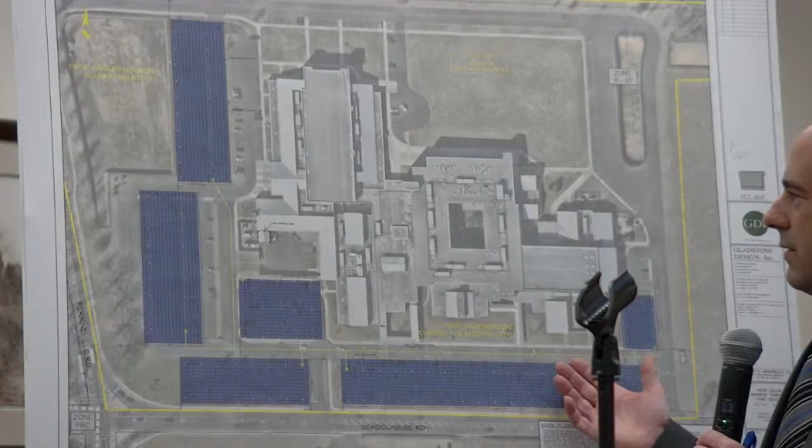Overall, the impervious coverage impact on this is negligible. Most of this is in impervious spaces already, so it's really going to be negligible impact from a stormwater perspective for impervious coverage because of the foundations. And under the municipal land use law, the solar panels are excluded from any type of impervious calculation.

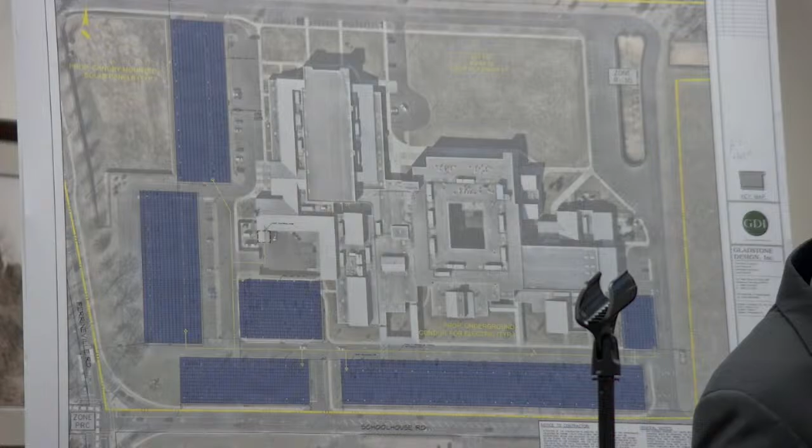That's correct. So the next one that I'm going to go to is the Applegarth Elementary School. So this is going to be A2, Mr. Michelle? A2 for the record.

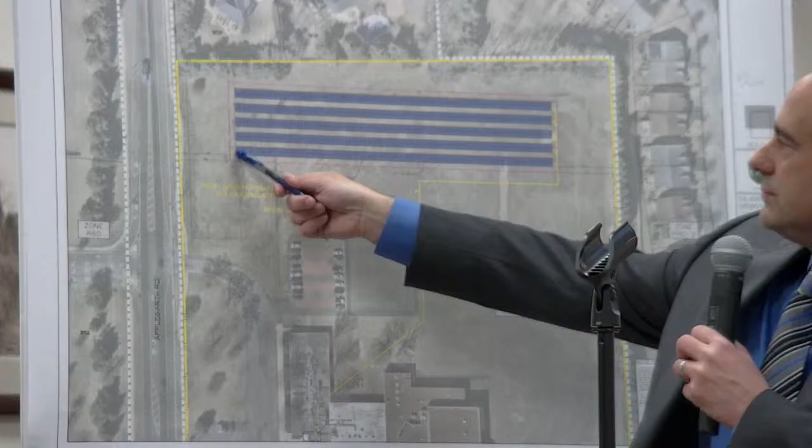So this is a section of the Applegarth Elementary School property. We're proposing a ground-mounted system for the elementary school. This one is actually going to be approximately 700 kilowatts, so 0.7 megawatts in size. It's a ground mount system, set up with panels in portrait orientation, laid out in 5 rows. They'll be supported by a pile-driven column that'll be driven into the ground.

In terms of impervious coverage for this, because we're using pile-driven posts to support it, it's almost negligible. It's about 30 to 40 square feet of impervious coverage for the pile itself, for the foundation, but the panels themselves, as Mr. Simon pointed out, are not impervious under the municipal land use law.

The height of this system is typically anywhere between 7 and 9 feet, based on the angle of the panels as they're supported. You need to have about 2.5 to 3 feet of clearance on the front edge, and about 8 to 9 feet of clearance on the back edge.

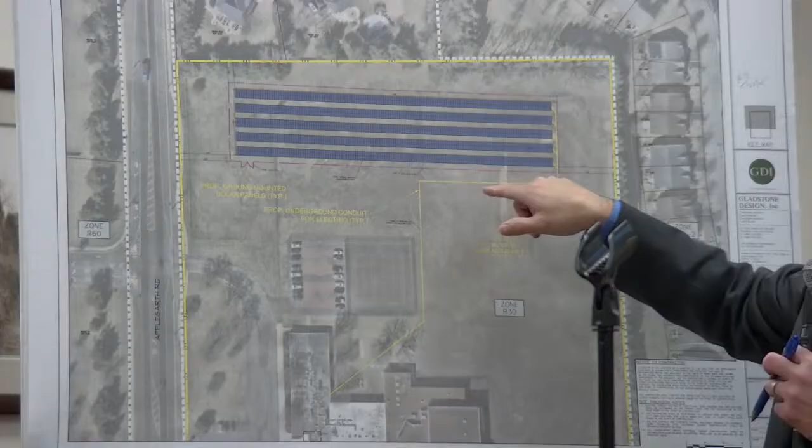It is going to be fenced in. It'll have a 7-foot high fence around it to separate the system from any activities on the property itself. There'll be a conduit run from the system back into the school for power purposes. There's no removal of any trees or vegetation or impact to any of the parking since it sits in a grass field area.

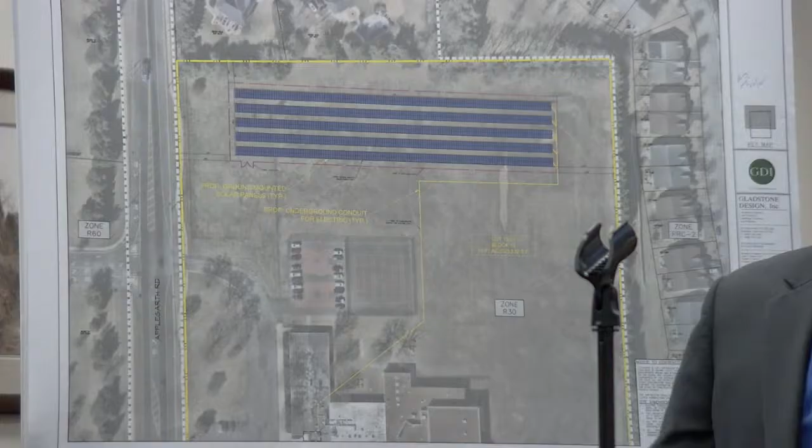There's no lighting proposed for this. There's no impact to that in any way, shape, or form.

The next one we have is for the Oak Tree Elementary School, and this will be A3, dated 5/22/25 for the record.

This is an even smaller system than the one you just saw a moment ago for ground mounted. Again, this is going to be in the field area to the west of the existing ball field, so we're not going to be impacting the ball field that's there now.

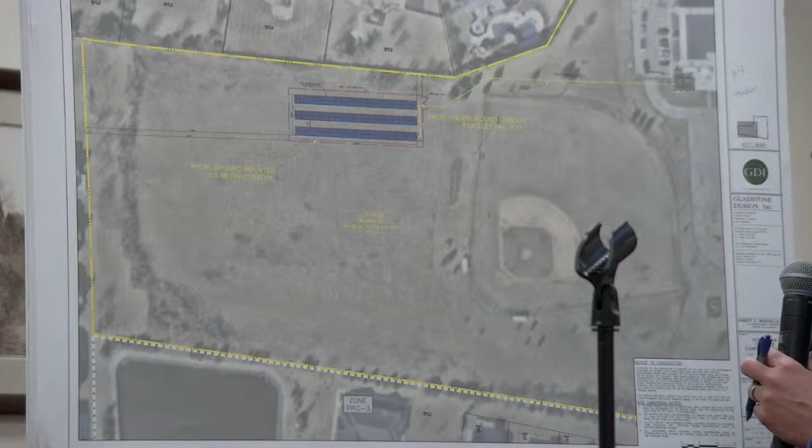This system's actually less than 0.2 megawatts, so it's really small in terms of size. But again, same parameters, same height of 7 to 9 feet, same fence around it, conduit being run back to the building. Again, no impact to lighting, landscaping, or anything on the property other than the area we're taking up for the panels.

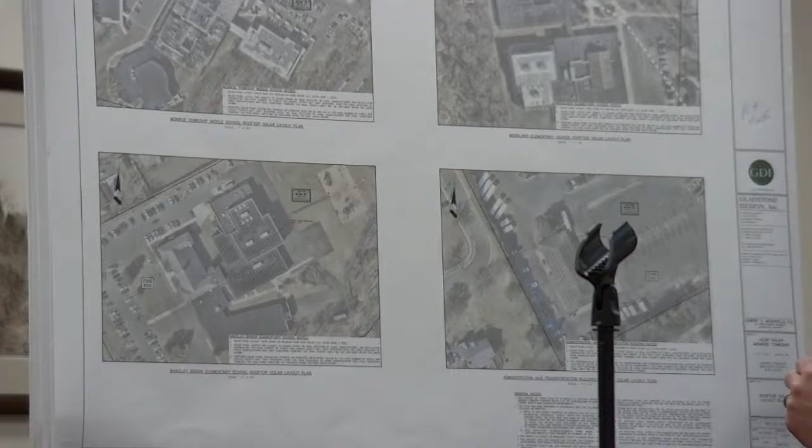And then the last board I have here, we'll call this A4 for the record. This is entitled Rooftop Solar Layout Plans, dated 5/22/25. This basically shows the 4 different facilities where they're doing panels on the roofs of the buildings.

There's no parking lot or ground-mounted proposed here. One is for the Monroe Township Middle School. The other one is for the Barclay Brook Elementary School. Then you have the Woodland Elementary School, and then you have the Administration and Transportation Building as well.

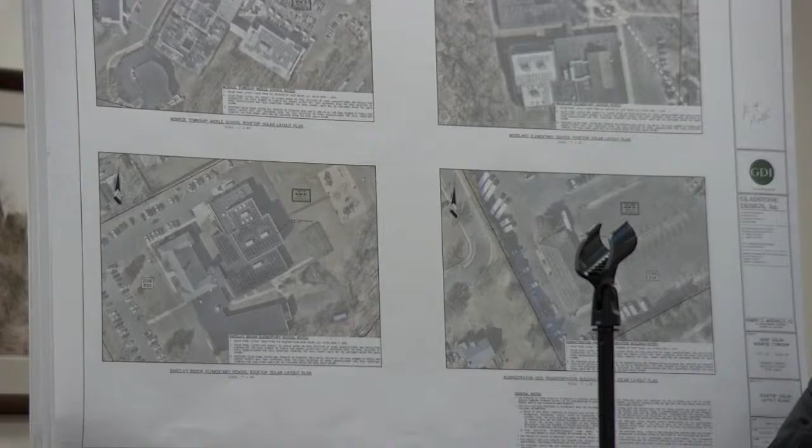So some of these roofs are flat, some of them have peaks to them. In any event, they're all going to be on the roof. Typically, for the flat roofs, they will not be visible from the ground level. The peaked roof, of course, you'll see the panels on that one, but there's no proposed removal of any trees, vegetation, parking spaces, or things of that nature with these plans.

That concludes my direct presentation. Thank you. So we'll open it up for any questions from Mr. Michello with regard to any of the projects.

Do any of our professionals have any questions? Thank you, Chairman.

What determines the size of the arrays at each location? Like you had a very small one at Oak Tree and a much larger one across the street at Applegarth. I'll say it typically has to do with the power consumption of the schools and the buildings, but maybe Ms. Brodie might be able to answer that question in a little more detail because they dealt with that when the RFP was put out for the power determination for each of the schools.

And will the energy generated from these solar panels power the school? Yeah, these are what we call net zero installations. So we can't generate more power than what the school uses in a given year. It basically goes back into the grid and makes the meter spin backwards.

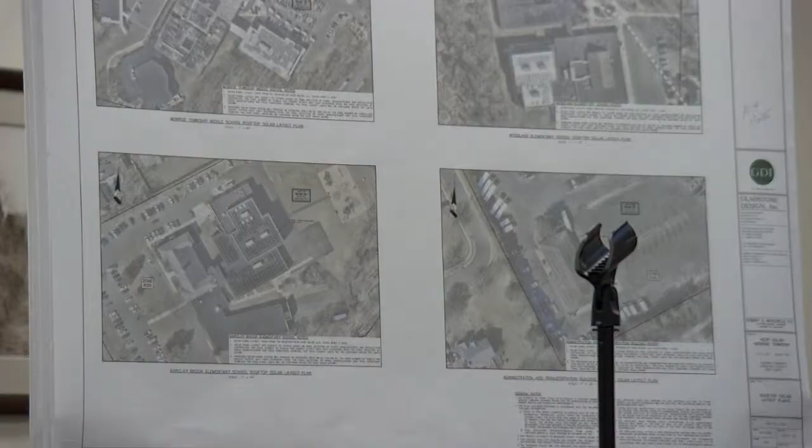So if they're using a certain amount of power during the day, if the panels are generating more power than the school is using, that power goes back into the electrical grid and the meter goes in reverse. So at the end of the year, they're supposed to have a net zero impact to the electric bills for the school. So essentially they're sized to handle all the power that the school uses?

They're usually sized to be slightly less than the full amount. You don't size them to 100% because you have fluctuations. So they're typically in the 90% range. But Ms. Brodie may be able to answer that a little bit more accurately because they do the electrical calculations as part of the power purchase agreement they put together.

Okay, I have some other questions regarding the panels that are on the roofs of the schools and transportation. How will you get access to those panels if there's a problem? I'm assuming it's the electric company that has to come out and maintain these. How will they get in there during school or even in the middle of the night? Would they come out for that?

It's actually HESP who's responsible for the maintenance since they're installing the system. So they would have an agreement with the school district to access the system and be able to maintain it. So they would have to work with them to get to the various facilities.

Is there ground-mounted equipment for the roof panels? The roof panels typically no. For the parking lot and for the ground mount systems, there will be a small utility pad closer to the building that they'll need for a transformer and things of that nature. On the parking lot ones, they typically put the inverters on the support system itself, and then there's usually a transformer close to the building.

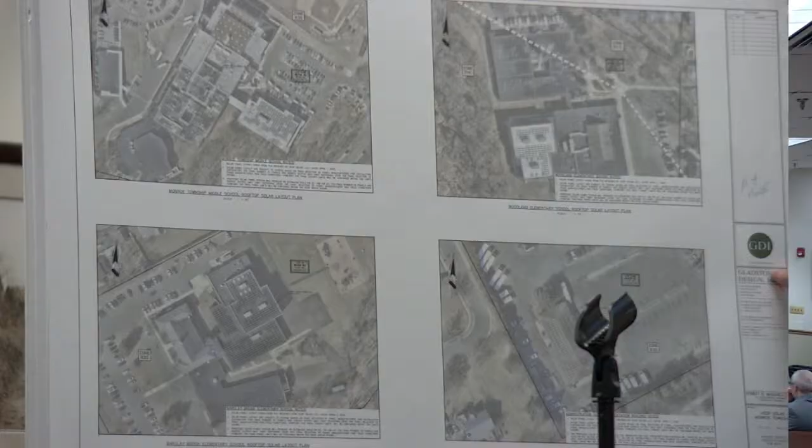Okay, I have more questions on the parking lot mounted solar. So with regard to the high school, you said site lighting is all going to be removed. So a concern is the site lighting outside of these areas where there was a pole-mounted light that covered the area beyond these solar panels. So you're going to be providing a site plan that shows all the lighting levels. How will that be accomplished?

Well, let me just back up on that for one moment. The only lighting that we're going to remove at the high school will be the lights that are in the islands where the panels are going. Anywhere outside of the panels, those lights are going to remain. So we're not changing those. It's only going to be where we're putting the panels in that we're going to install lights under the panels.

So there'll still be ample light beyond these solar panels from the existing lights? Because it appeared that some of the lighting you were removing may impact some of the sidewalk areas closer to the school, like across the aisle from the school.

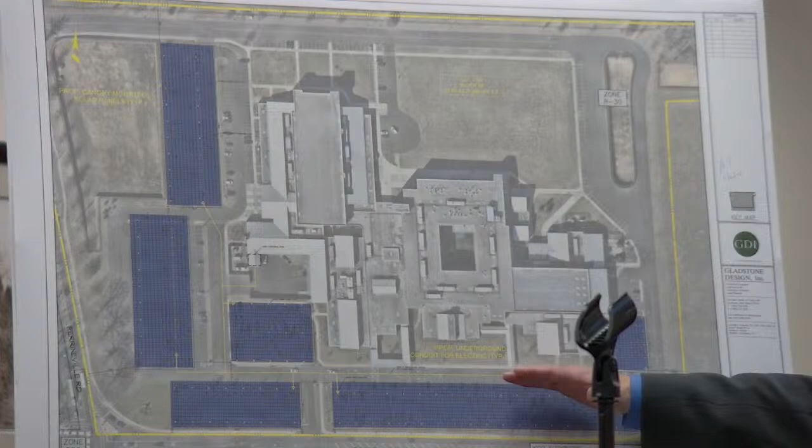Correct. If we're going to be removing a light pole that's, let's say, in this row of parking underneath the panels, we're going to make sure that we provide enough adequate lighting to reach the same level that pole reached under existing conditions. Yeah, you're right, if the poles are a certain height, they do have that throw, and we want to cover that. So if we have to put a light on the end of the panel to angle that way, we will do that. We're going to look at that as part of the final design we do for the building permit.

Thank you. The other thing on the high school, the access aisles - you have the entrance coming in off the schoolhouse, but you have the solar panels overhanging that drive aisle. So my concern is school buses, fire equipment coming in or out of there. It's really on the egress side where the panels overhang the drive aisles. And then also the one at the top of the page, the drive aisle there, upper left - that one's over the main drive aisle. So again, just a concern with the drive aisles, if fire equipment's going to be able to get through there, and school buses.

Yeah, they're designed to have a minimum of 14-foot clear, and because of the size of these panels, we're double spanning. They're typically between 14 and 18-foot clear on the bottom side. So your 14 is your max for traveling on road. So I know it's here for a courtesy review, but I would just ask that you run that by our fire department.

We'd be happy to do that. Typically for these projects, we'll run it by the municipal fire department. As for your question about accessing the roofs for the panels, we coordinate that with the fire company as well in terms of access.

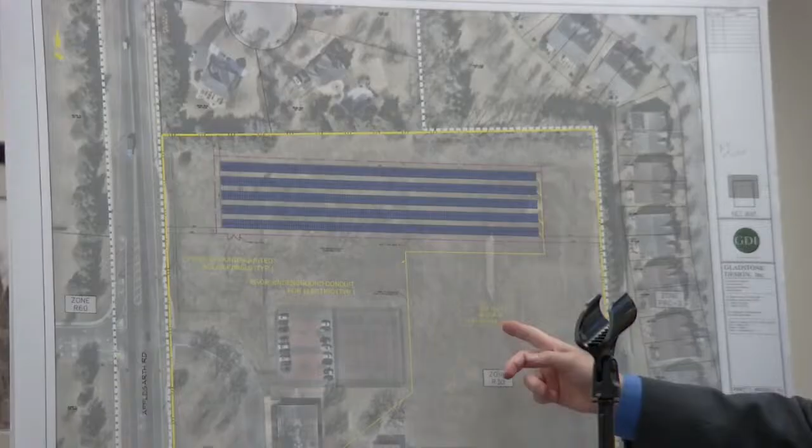Okay, great. I'll go to the Applegarth School, the ground-mounted one. You're removing a cricket field, this is on A2, and yes, some recreation areas out there, it looks like.

With the school expansion, why would this be going out in the field instead of on the building? I'll have to defer to Ms. Brodie on that one, because they had, or the RFP had listed where to put these facilities on the property.

So it is going over a field, and looks like there's some softball fencing there. As I know well, this came through the Board of Ed, so they have no plans to expand or put a building over there. Mr. Take, can you respond to that question?

Okay. Anybody from the board? I actually have two questions. Mic on. Can you hit your mic? If not, maybe we can have the appropriate person respond. There you go, okay, there we go.

So the first question is, just to make sure we understand, you've used a conclusive term a few times before in referencing net zero. Can you explain what's meant by that? Is it going to be zero cost now for electricity for the school district because of this? Or is there going to be a net zero change from what the cost is now? Or does it mean something else?

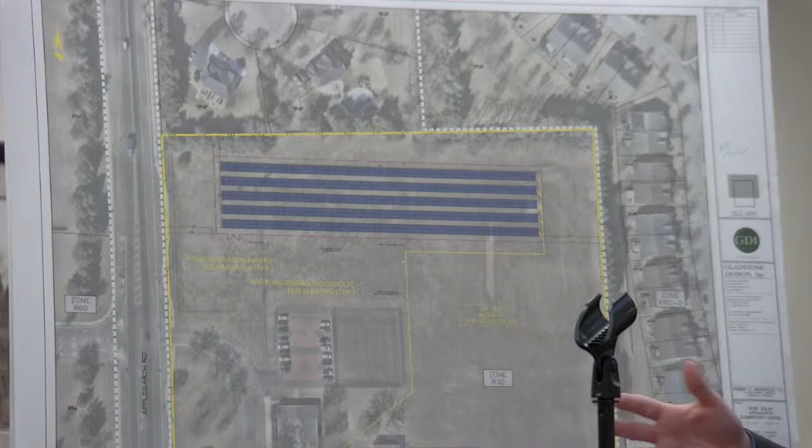When I refer to net zero from an electrical standpoint, and I'll let Ms. Brodie talk about it from a cost standpoint, net zero from an electrical standpoint means you're generating almost enough electricity where you're not putting it back into the grid. You're not using more than you're making, and you're not using less than you're making. You're basically supposed to balance out your power generation over the 12 months, and that's why they say net zero in terms of use. So the power use is what's netting at zero, but as far as the cost to the district for electricity, between what it would cost for conventional electrical power as exists now versus what the costs are going to be by implementing this system, that's the savings.

Mr. Weiner, I think that's really a question Susan will be able to answer. I'll wait till we hear that.

My other question was, has this been reviewed and evaluated by the police department or public safety? My concern is particularly by the high school, where these are elevated above parking areas, there's the potential for obscuring vision for security purposes in a great majority of the parking area. We're talking about a school where there are students, not everyone drives, as well as employees and so forth. My concern is particularly activities that happen later in the day, in off-season, winter, fall, when the sun sets earlier. How is that impacting the visual ability for security to make sure it remains as safe as it is now?

So does part of the plan include any type of cameras to be integrated underneath the panels? What's the perspective on that for safety and security, and have our police department and school security chimed in?

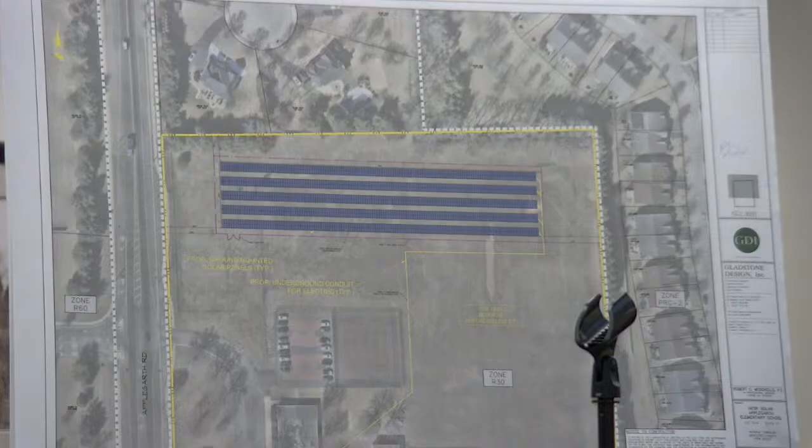I'll speak to one part and defer the other to Ms. Brodie. These panels are typically a little higher than your typical panel. Usually you'll have a panel over just a portion of the parking lot, but because this one spans multiple parking spaces, there's a higher clearance underneath, which actually helps with visibility under the panel from ground level.

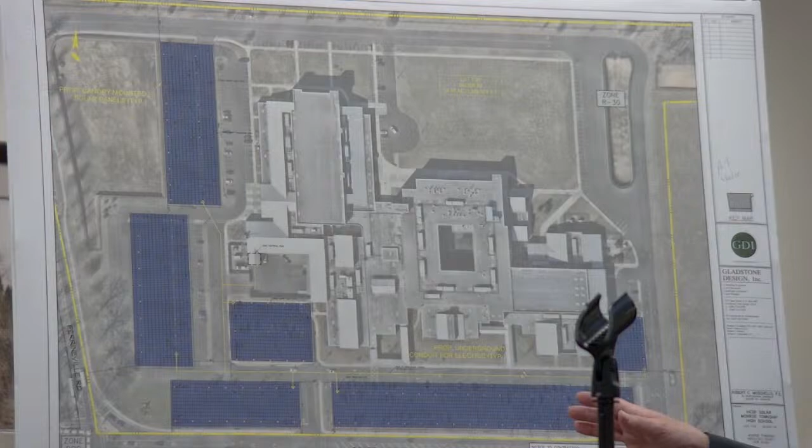But what about from above? If school security has cameras elevated on the building, they may not be able to angle to get underneath, and that area could be obscured. Usually what we see with installations like this is HESP will work with the schools and their security, and we've done this on other facilities where they have to put new cameras in underneath the canopies to make up for what they might have had on the building. That's something HESP could speak to in more detail.

So my question is whether there are going to be cameras, and also whether this has been reviewed by the public safety department in the town. We'll check on that - I don't believe this has happened yet, but we can certainly go to them, like we did with the fire department, and review it with them as well.

It's typical that before we get building permits, we talk to the police department and the fire department, just to make sure they have no issues with existing versus proposed conditions.

I understand that, and I realize this is a courtesy review, but concerns of safety are the same whether it's a courtesy review or an actioned application. If this were an application where the board is taking action, it would either be reviewed, or that may very well be a condition of approval. So that's why I'm asking if this has been done yet - has it been evaluated from that standpoint or not?

Absolutely, thank you. Excuse me, are these panels going up on stanchions, or are they one big structure? And how much room do you leave between each parking spot?

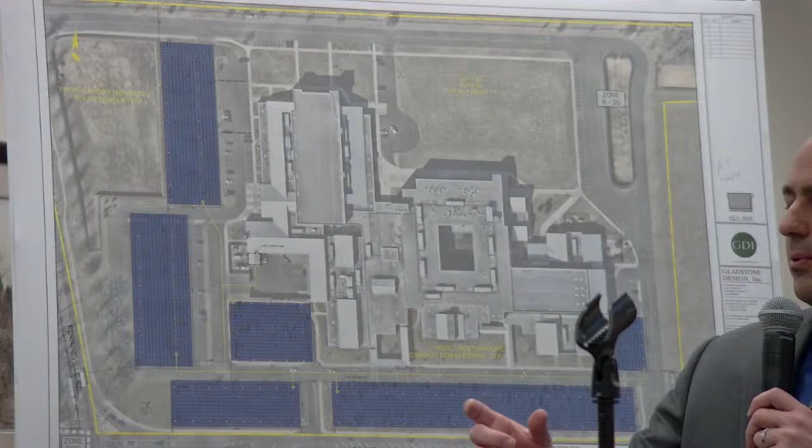The way they're designed, there are columns that support them, typically spaced anywhere between 27 to 36 feet. They try to keep the spacing even with the width of parking spaces - a parking space is typically 9 feet wide, so you'll have 27 feet for 3 spaces or 36 feet for 4 parking spaces. So you have a column every so many spaces, and that column goes up to a steel structure on top that supports all the solar panels. If you're looking from underneath, you'd just see columns supporting it, spaced apart, spanning the width of the parking lot.

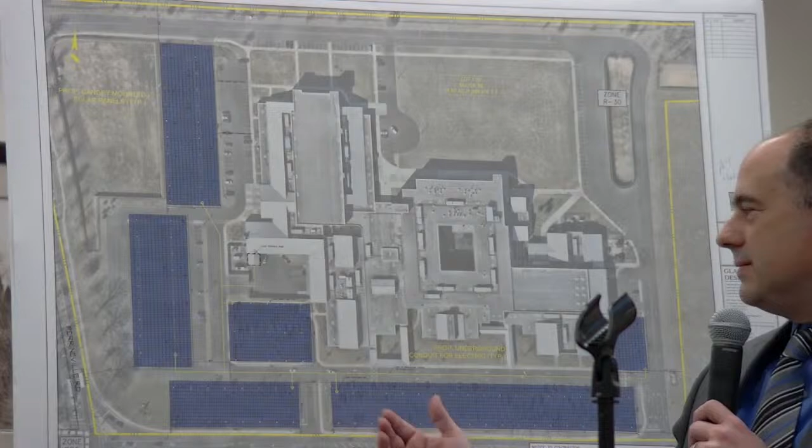How much room do you leave for when cars pull into their parking? Typically we locate them either at the head of the parking space by the curb, or in the island behind it, so it's not impacting anybody opening a door. It's not designed so that when you pull into the space, the column is right there when you open your door.

Chairman, I just have 3 more questions. Regarding the Applegarth and Oak Tree ground arrays, I'd like to see some buffering for glare from these panels, heading towards Applegarth Road or the residents.

Usually when they're ground mounted like this on a pretty flat site, glare usually isn't an issue because of the way the sun comes down, even when it's setting in the evening - it's usually minimal. It's when you're from a further distance away and up on a higher elevation looking down at the facility that you'll get some glare, and even then it's only for a few minutes in the morning or evening hours at most. But in this case, because everything is relatively flat, glare usually isn't an issue.

So it shouldn't be an issue? Okay, next thing - are you going to be providing access roads to get to those panels on Oak Tree and Applegarth?

There's no roads proposed because the only typical maintenance for these is, once it's built, mowing the lawn to keep the grass height down so it doesn't grow up to the bottom of the panels. That's why they're about 2.5 feet high off the ground to start. If they need to access them for maintenance, they'll bring a truck and drive on the grass to get there. But they don't usually go out unless there's a problem.

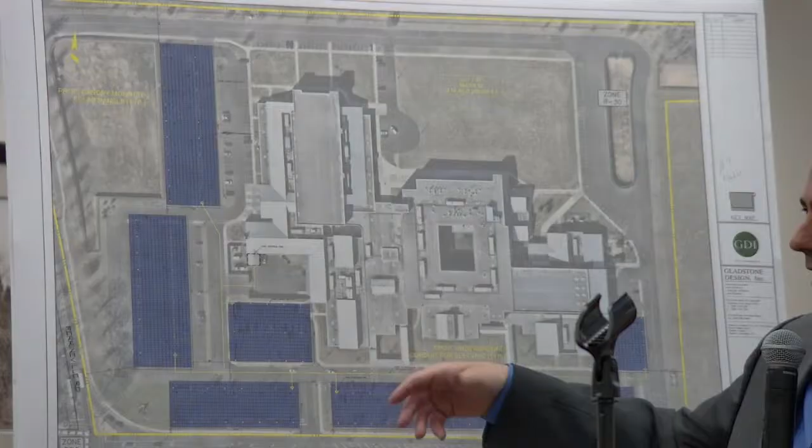Will each panel have its own inverter, or is it grouping? What they do is group them. Depending on the electrical engineer's calculations, they'll group a certain number of panels together to an inverter, and then that inverter gets strung back to the transformer. So there's multiple inverters, like I said, for the parking lot system. Those are typically mounted on the poles up at the top. They're small now, a lot of them are the size of personal computers. You'll see a box on there with a fan, which is quiet in terms of noise generation. They'll string those together until they get back to the electrical room where the transformer would be. For the ground mount ones, the smaller systems, they might only have one or two, so they might just put it back by the electrical room. That'll be worked out by the electrical engineer during final calculations.

The reason I bring that point up is that if you have a lot of inverters, if they're going down, I don't know how frequently that happens, or if there are issues, you'd have to keep going back and forth to service or repair them. So I don't know if somebody can address that.

Typically with these systems, they don't really have much problems. A lot of times you'll get a panel or two damaged, and they'll come out and replace them at an appropriate time. If you lose 2 or 3 panels, it's not really an issue early on. If you have damage to multiple panels, it knocks out certain circuits, and you have to come out and do maintenance sooner because you lose power generation. But generally speaking, it's all monitored remotely. They have digital monitoring of the system, so they know how much it's generating, and they'll come out and check it if there's an issue, and they usually replace it pretty quickly.

What's the threshold that they would come out? Is it a certain amount of panels, certain amount of production? I don't know, it depends on how it's being generated. So Susan could answer that one.

Yes, okay, I'll get another witness to answer that, or try to. Anyone else? Okay, Mrs. Simon, if there's no other questions, then we're going to have Ms. Brodie come on up.

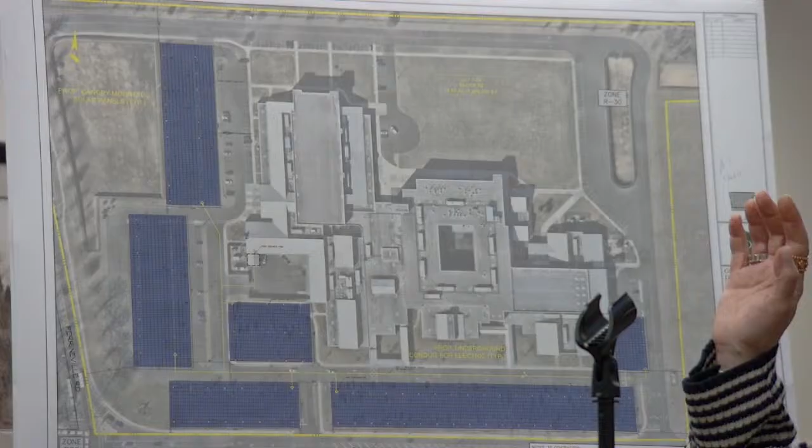Thank you. Good evening. If I could just swear you in quickly, raise your right hand for me. Do you swear the testimony you're going to provide is the truth, the whole truth, and nothing but the truth? I do. If you could state your name, spell your last name, and give us your address for the record. Susan Brodie, B-R-O-D-I-E. My address is 1 Fieldcrest Drive, Monsey, New York, 10952.

Ms. Brodie, just describe what your position and responsibilities are with regard to HESP Solar. I'm the Chief Operations Officer at HESP Solar, so basically everything at HESP Solar is my responsibility. And you're familiar with this solar presentation with regard to the various schools, correct?

Yes, I am. So there were a bunch of questions that were asked. Mr. Michello answered some, I answered a few, but I took some notes. There was a comment about access to the roof for the panels, and I talked about coordination with the fire company. Can you just maybe elaborate on that?

Yeah, so each individual site will be assessed as to what the school accommodation is to reach the roof. Many schools have direct internal access to the roof, and if the school will let, then that will be the access. Sometimes we have a situation where we have to put a ladder up against the side of the building to access the roof, in which case we do that, but usually we don't. Usually we access the roof from inside the building.

That's not for people doing construction. The construction workers will always access by a lift at the side. We don't want construction crews walking through a school ever. But for maintenance or for emergency situations where we needed to access the roof to deal with the problem, we would usually access from inside the building. Once construction was finished, we would remove the lift and the ladder, and there would be normal roof access. And a related question was asked regarding security, about coordination as to any existing or proposed security cameras and coordinating with the police department and public safety.

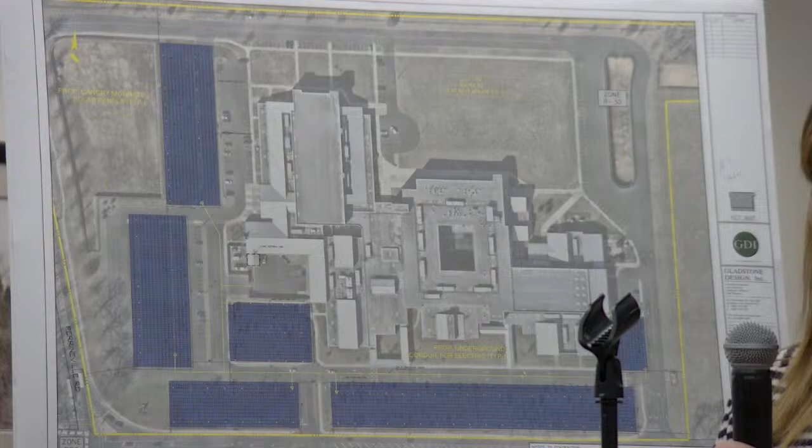That's a good idea. There was also a question about the lifespan of the panels, and I believe it was answered as 25 years. So the contract with the school is for 15 years because that's New Jersey state law, the school can't go out for more than 15 years on a service contract. Most schools do look to extend the contract, which they're allowed to do, up to 3 times, for up to 3 5-year extensions. But the contract that we have with the Board of Education clearly calls for their right to exit the contract after 15 years in one of 3 ways: either they can ask us to remove all the systems at our own cost, or they can ask to extend the contract, or they can ask us to buy out the systems so they can benefit from free electricity, since they won't have to pay us if they own the systems. They would have the right to buy those systems at fair market value, which we think in 15 years will be very affordable for boards of education.

The life expectancy of a solar panel is about 40 years. The 25 years Mr. Michello was referencing is that they're warranted for 25 years, but we expect them to outlive the warranty. So the systems will be good for a long time.

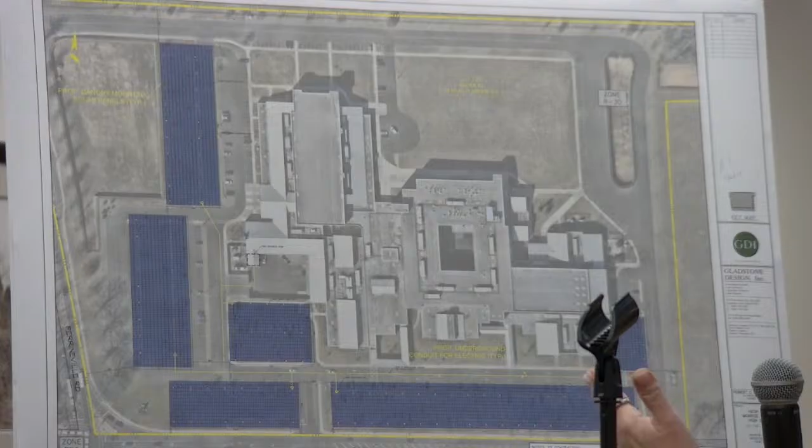Does that 40-year figure cover the degradation of 2% or whatever was mentioned, up to the 40 years? I never like to correct any of my reps, but the degradation is really about 0.5% a year. So over the life of the system, it does degrade by several percentage points, but it will take the systems from providing 99% of the power to 97 or 96% of the power required by the schools, and that would continue past the 15 years too.

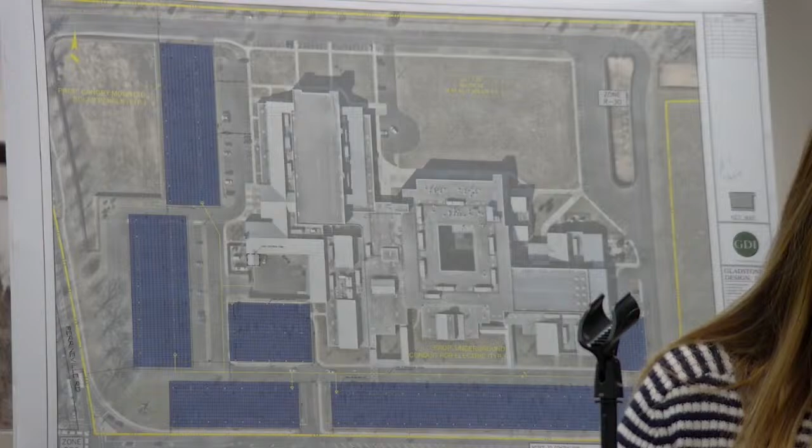Thank you. So I think, unless there's any other questions, that concludes our presentation. Again, we do believe that the project is consistent with the master plan. There are many references to support solar projects such as this one, and we are proud to be part of helping the school district and saving it a boatload of money. Thank you.

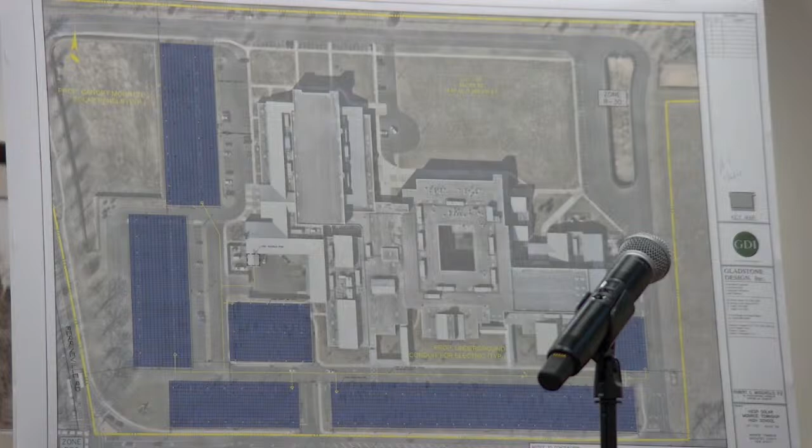Oh, you take them. Yeah.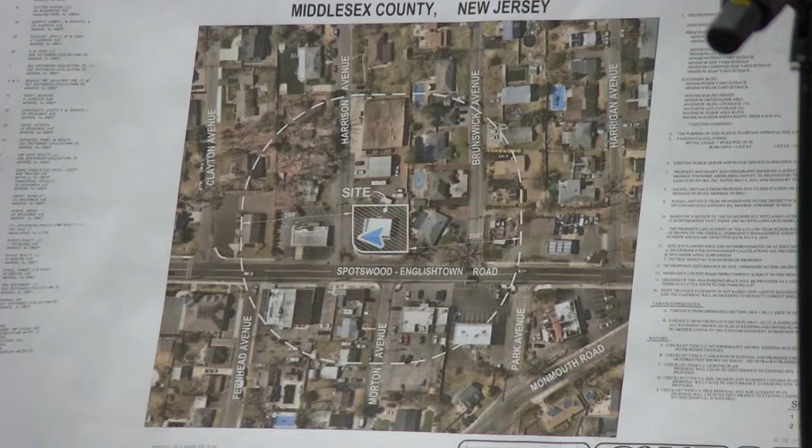So, as noted. And Ms. Totten, these plans were submitted as part of the application submission? Yes, they were. As noted, the intent is to organize this.

So, in the middle, dominating the property, is the rectangle that has the building. There is a depressed curb about a little less than halfway from the right side of the property to allow access to the parking area that goes all the way around the site. Harrison Avenue on the left has no delineation between Harrison Avenue and the parking lot.

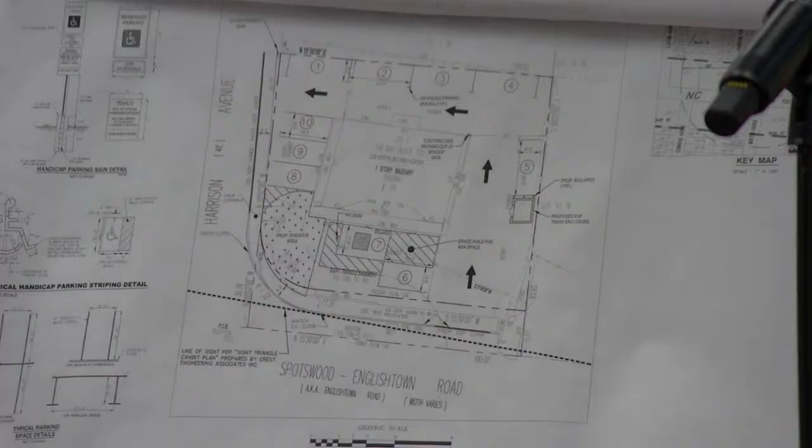So what we're proposing to do, and this took a lot of thought and work with your professionals, is to restrict this circulation to one way through the site. Right now, you can actually turn from Spotswood Englishtown Road right into the site. Oop, come on, I guess my battery went out. Right into the site. I'm going to go up because I do better pointing.

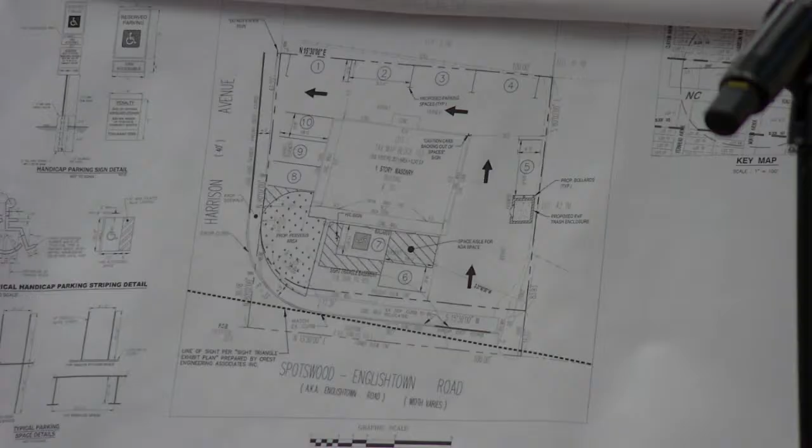Right into the site from there, which is very close to the road and not really a safe condition. So we are proposing to remove the pavement in that area for a bigger chunk of green, where, should you approve this, we would submit a landscape plan showing what shrubs and perhaps trees, depending on sight triangle issues, we can plant to bring some green to this corner. If you've looked at the planning letter, there's a picture of the front of the building, and you can see it looks somewhat bare.

Additionally, it needs 10 parking spaces, 1 handicap accessible space, and a place for our trash containers, which was a challenge. So what we did was utilize parallel parking across the back, with a parallel space and a dumpster enclosure located a foot off the right property line, which is a variance. But due to the size of the property, there aren't many good spots, and this will enclose the trash, which has no enclosure now.

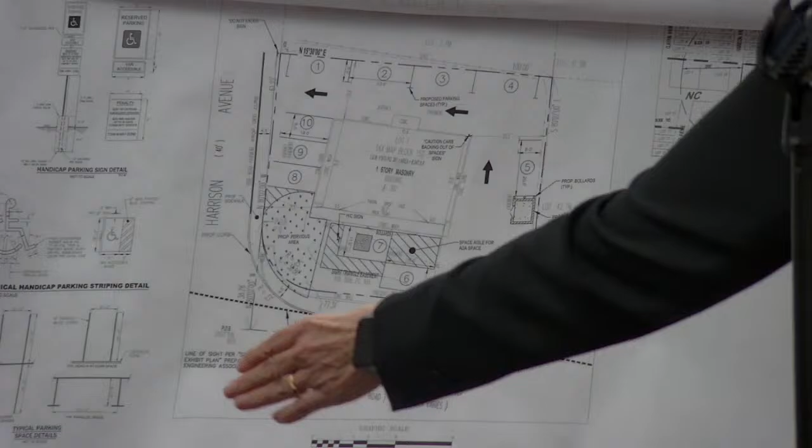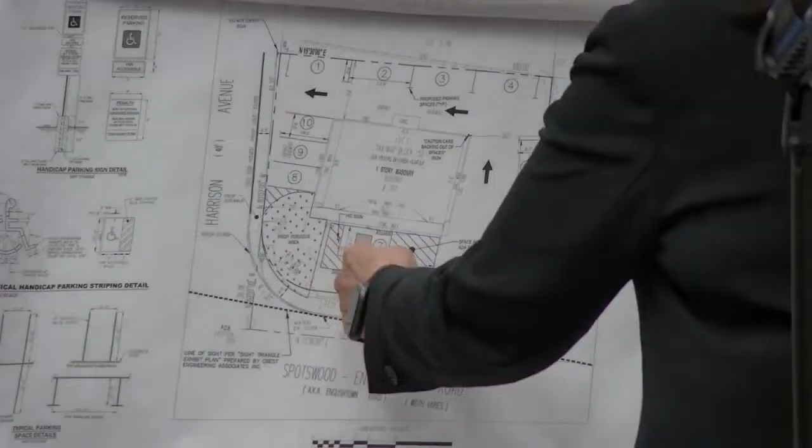But Harrison is a very small street, and we're trying to maximize parking. There are other areas in this part of Monroe with small side streets where people back out onto them, so I don't think safety is a terrible issue here. We are making safety better by taking the pavement away from this one corner and not allowing vehicles to come in. I had thought of that at one point for this space, but it's just too close to Spotswood Englishtown Road.

So with that being said, we are reducing the impervious cover on the site a little bit. We are improving circulation, even though we need variances for parking space size, aisle size, as well as parking in the front yard, and we don't really have a spot for loading. But this is a very small building, 1440 square feet, so the type of business that could comfortably work here will not be large either, and deliveries will mostly be UPS and that size trucks, which can park in one of the parking spaces.

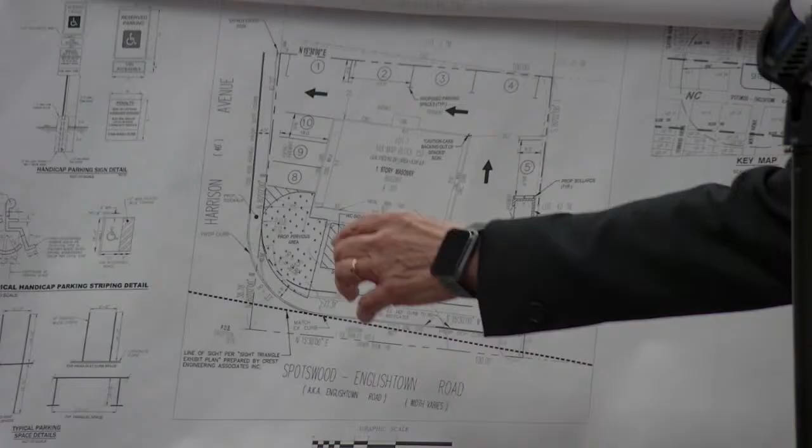One of the requests from the planning letter is to provide an EV space. I didn't even think about this, but it's great, because when you provide an EV space, you get 2 spaces for the price of 1. So now we have 11 spaces if we designate space 10 as an EV make-ready space, and we're over by 1. Of course practically we're not, but for purposes of counting parking spaces we are. We'd propose to make number 10 a make-ready space because it's close to the building for electricity access, and I think they make EV charging stations you can mount on the wall, which would be good for this spot.

Let me check my notes to make sure I covered everything.

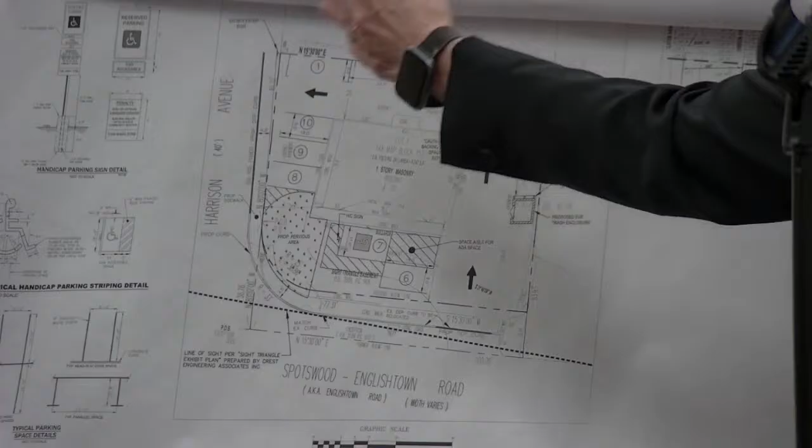We talked about trash and access for trash removal. That's not easy either, it's a small site, we only have 20-foot aisles. So what we propose is, there's a lot of residential along here where people just put their trash cans out and they're picked up by the public system. This would be private haulers, but we propose to do the same thing. It'll be organized, the owner will know when they're coming, we'll put the cans out and they'll be taken away. It's trash cans, not a dumpster, maybe large ones but on wheels that can be rolled down to the corner. That's what we propose for trash removal.

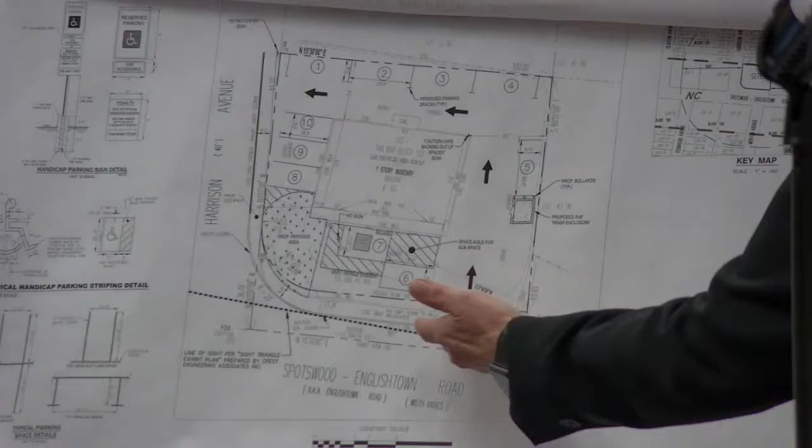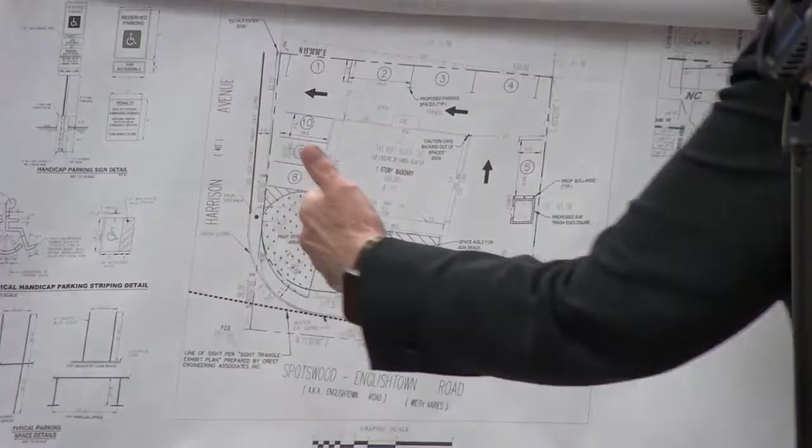Middlesex County Planning Board, Middlesex County owns the road, so should you approve this, we'll go before that board and abide by whatever requirements they have for curb and sidewalk. There already is curb and sidewalk here. Generally these days I believe this right-of-way shown is sufficient, because they usually just say put the right-of-way 3 feet behind the existing sidewalk. I forgot to say there is no curb on Harrison, so we're going to put a depressed curb to delineate the edge of the property and the end of the parking spaces so everybody will know where it is, and connect it into the existing curb, putting in a nice smooth curve down to the main road.

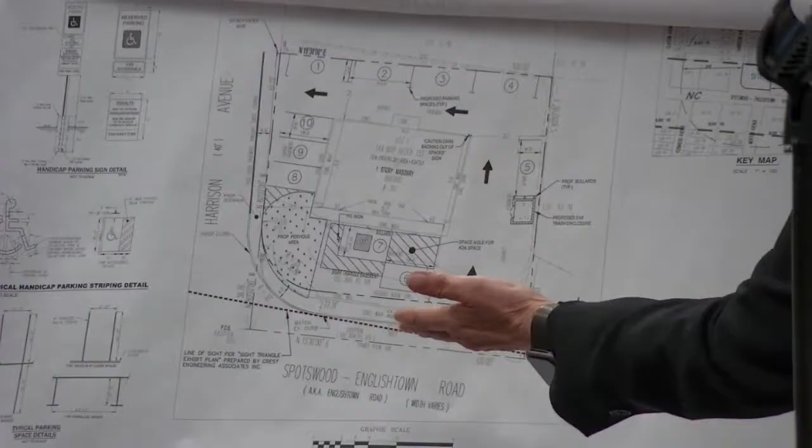I think there is an existing sight triangle easement. If you look at the existing conditions plan, it crosses right through the middle of the property. That sight triangle is dedicated to Middlesex County, and one of our goals would be to address that it's an old-fashioned sight triangle where they just said go 100 feet up the road and 300 feet up this way and connect the dots. Now you use the AASHTO requirements, shown here, where you come up 14 feet off the traveled way and go down 350 feet or so depending on the speed. As you can see from this dark line, the line of sight is not even in the property at all, so I believe we will not have a difficult time with Middlesex County in changing over that particular easement.

Ms. Totten, just to summarize a couple things, I want to ask you some planning questions. In terms of the engineering, the highlights of this site right now are that there's really no delineation of parking. Correct. So we're obviously going to provide clear delineation of parking, we're eliminating that parking area at the corner of Harrison and Spotswood Englishtown Road, and if that was in the sight triangle, that's being eliminated, so that's certainly an improvement. We're adding some green space in that area, reducing impervious coverage, putting in one-way circulation which is much more organized, and providing a dumpster enclosure and a procedure for trash pickup. Is that more or less a summary of the improvements we're proposing here?

Very succinct. And in terms of planning, I know you covered that we needed variances as pre-existing nonconformities for just about everything based on the size of this site. We're not aggravating any of them. The one variance we are triggering, though, is the trash enclosure. Yes, however, we don't have a trash enclosure there now. Correct, so what we're doing is providing a trash enclosure.

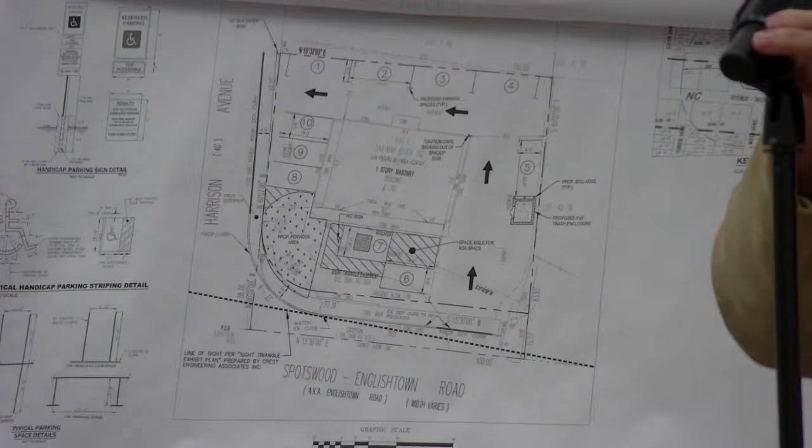If you could state your name, spell your last name, and give us your address, please. My name is Renata Paradysz. P-A-R-A-D-Y-S-Z. And I'm actually owner of the house next to the property, 300 Spotswood Englishtown Road.

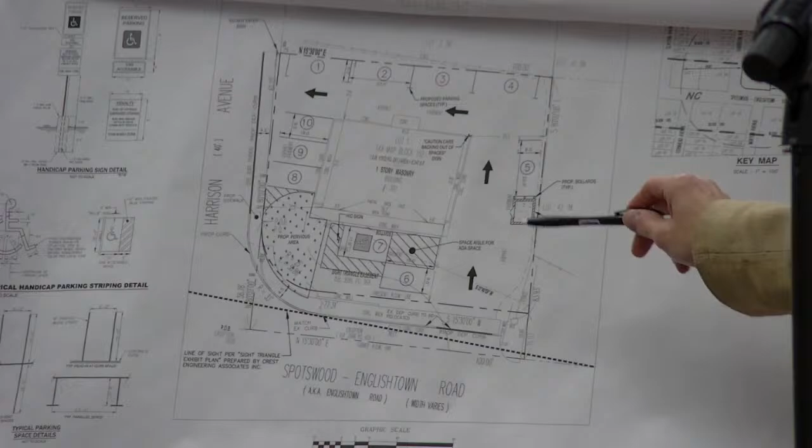And I own the house and the small hair salon. So I've got the question because I could see that the dumpster, it's gonna be right here. I don't know if that's a good idea because that's actually it's my backyard. So I don't want to swimming and smell there. If there is any other place that we can actually put the dumpsters somewhere else?

Well, I don't know if Lorelei, is there any accommodation we can make? I mean, that's really the only space that we could put it in without losing any parking.

I will tell you this, it will be a dumpster enclosure, so it'll be enclosed. We will ensure that any trash that's put in there, any recycling that's put in there, there'll be a lid on top of the enclosure. So it will not be open to the air.

Yeah, but still, I don't know if that's a good idea. And then, wintertime, it's different. But summertime, when it's really, really hot, the smell, it's actually, and then there's other activities like mice, rats. So I don't know if I would like to have that just close to my pool.

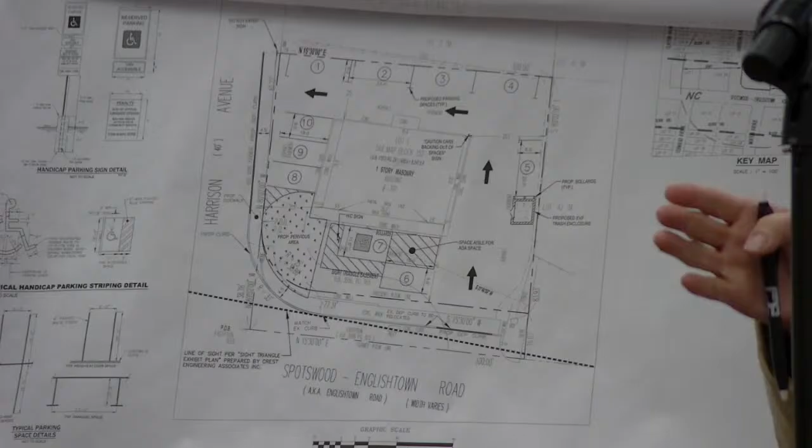And then another question, if there is a hair salon, does the township allow another hair salon next building? Because that would be a problem too, because I know that you don't still have a tenant, right? Yeah, but that for me will be a problem if another hair salon will be that close to me.

Just to say, I don't know of any, that's just a market, the market will drive whether or not. Township doesn't have any requirements? No, there's no space requirement. I mean, frequently you'll see a bunch of gas stations all across intersections from each other. I can appreciate that, but unfortunately there's no regulation that stops two of the same business type going in next to each other.

I've been advised by my client that it will not be a hair salon. Okay. And please, if you can find some other place for the garbage, that would be great.

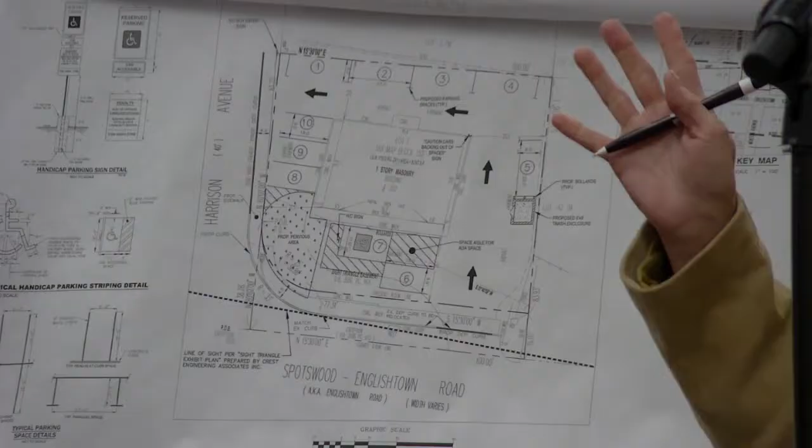I could see where that would be an ongoing problem. If there's something that could be done, or in a follow-up review where we could find another location, so she doesn't wake up each morning to smell what was dropped before, that'd be great.

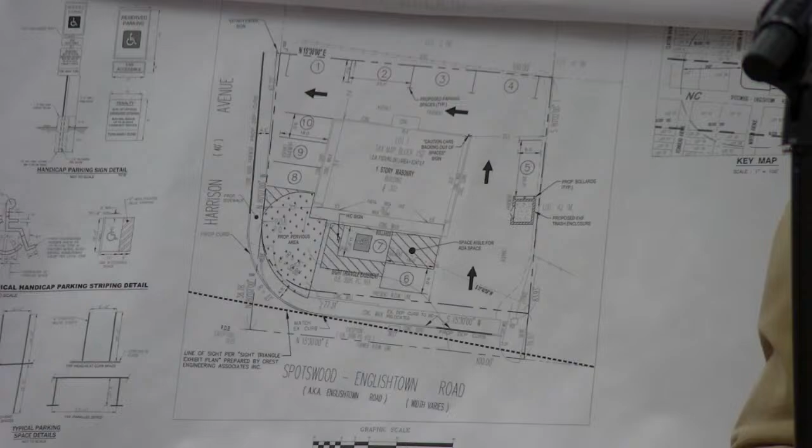Mr. Chairman, I'd ask the applicant, can the dumpster be moved against the building on that side? It'd still be on that side, but it'd be further away from the property line. We could look at that.

Then the space would need to move as well. And maybe in this circulation, if we put the parking space in front and the dumpster behind, I would be happy to work with Mr. Rasmowitz to see if we can move it away. You're welcome, that would be great.

Thank you. Mr. Chairman? Just to follow up with regard to the trash enclosure, I realize there's been no tenant and we've had no testimony basically about operations, but do we know who is going to be responsible for arranging for trash pickup? Is that going to be a tenant or the landlord? It's going to be the property owner.

So would the property owner be willing to consent to some type of schedule, like once a week, twice a week? When is trash going to be picked up? And then if it's going to be even delegated to a tenant, then it's going to have to be a condition in a lease to make sure at least the member of the public knows, all right, they're coming so many times a week. It's not going to be random, if we can.

No, it won't be random because as I've indicated at the outset, we'll make sure that occurs during off-peak hours, when the business is not being operated. The property owner will be responsible for the trash removal.

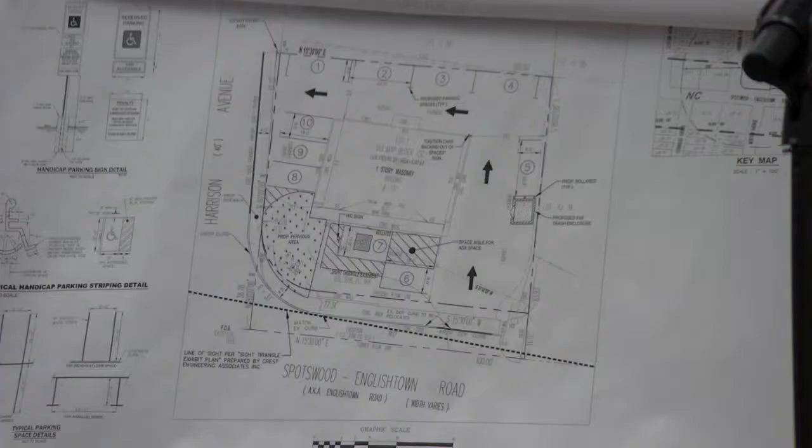So what do you- Moving along on the agenda, under memorialization, there's no resolutions to be adopted. Is there anybody from the public that wishes to be heard on any other topic? Hearing none, is there a motion to close the public portion? Second, okay, public portion closed. Any discussion items?

Hearing none, and I see no correspondence, so we move on to, is there a motion to adjourn? Is there a second? All in favor? Please do.